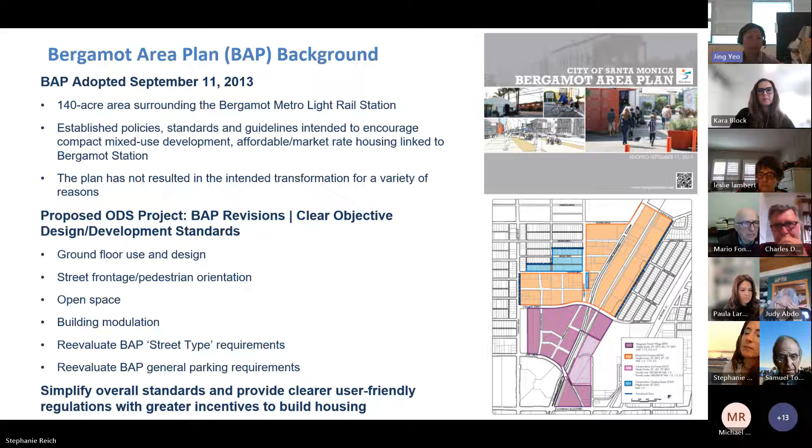Thanks, Jing. Want to make sure everyone knows that these are still concepts, and your feedback is really important to us as we move through the development of the plan.

We're looking at the existing standards in the plan and also at other areas in the city, like the Downtown Community Plan standards, an area plan most recently adopted in 2016. We've been hearing that those standards have worked — we see a lot of new construction downtown — so we're using some of those standards to pull them over to the Bergamot area plan.

As Jing was saying, because of the industrial nature, the parcel sizes are very large, and it's a really different type of area. The Bergamot area plan did identify 3 or 4 different areas within the plan, each with its own character and development pattern, as you can see in the lower right-hand side.

We're thinking of simplifying the standards, finding the right size for all of them, and simplifying them throughout the area plan. As Jing mentioned, we're going to be focusing primarily today on open space. We believe open space and permeability through these larger parcels is essential to making it into a livable neighborhood.

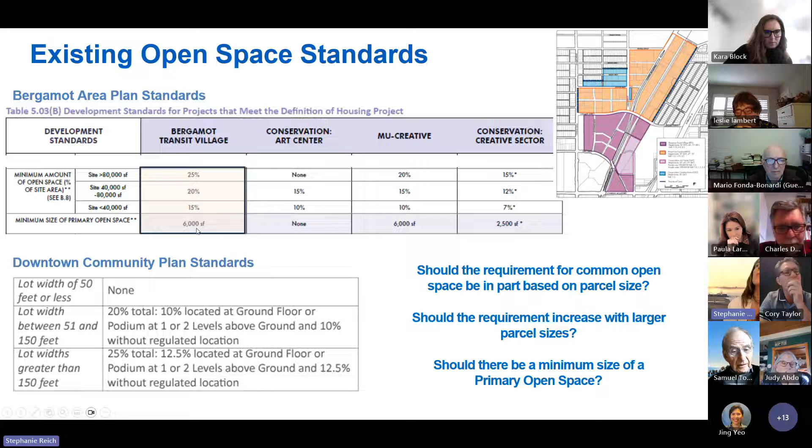The Bergamot area plan really envisioned, as Jing was saying, a transformation from this light industrial area with large parcels to mixed-use development and housing. We anticipate with the new zoning standards that transformation will likely occur. So we want to make sure the standards are simplified, that we get the housing we want and the livable neighborhood we want. The Bergamot area plan had some, we think, fairly stringent and complicated standards.

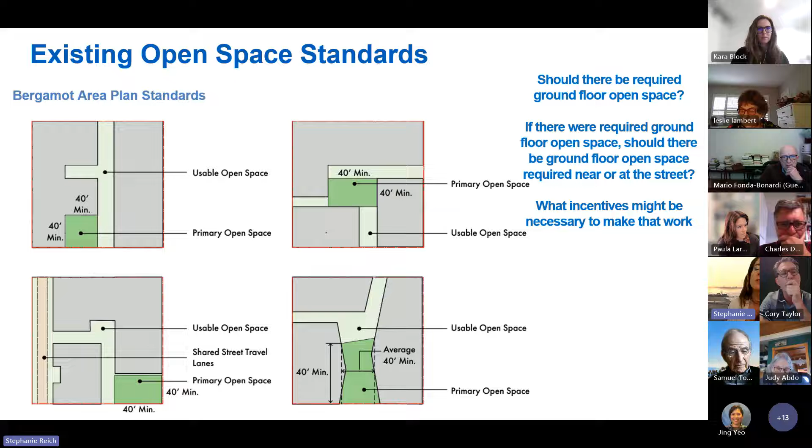This is a diagram for ground floor open space requiring a 40-foot by 40-foot minimum area and identifying where it should be on the site. One of the questions we have for the group is, should there be ground floor open space required at grade, knowing there may be subterranean parking underneath? And if ground floor open space is required, should we require it to be located in view of the street or near the street? If that's a challenging requirement that requires incentives, what incentives might make that work?

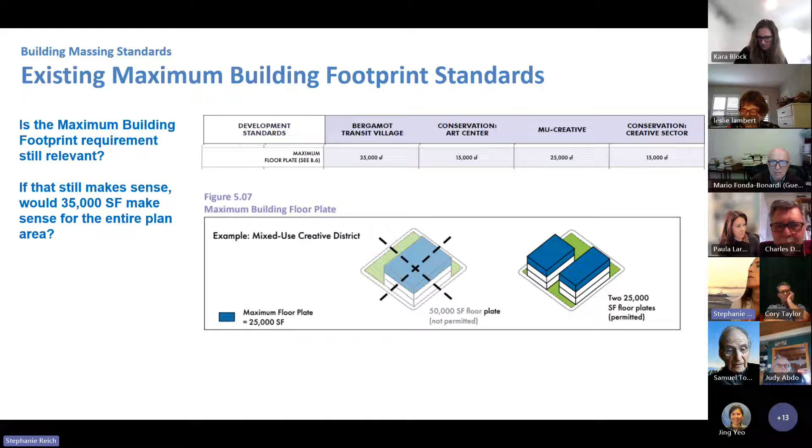Maximum building footprint is a requirement that dovetails with the ground floor open space requirement. We do have maximum building footprint standards in the Bergamot area plan, and we also have that citywide. So we're thinking the maximum building footprint requirement may still be relevant. If it is relevant, what size of footprint would make sense? Would that be a 35,000 square foot footprint? Would that make sense for the entire plan area?

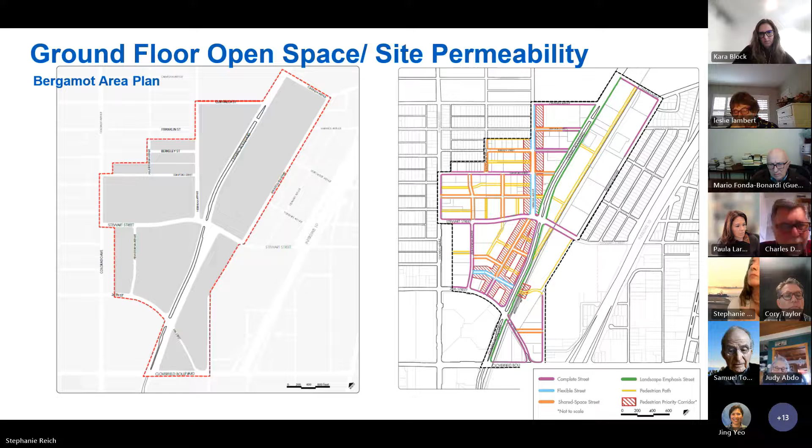AECOM and Susan Ambrosini has done some studies for us, so I'm going to turn it over to her for a bit to talk about the work she's done looking at parcel sizes and permeability. Susan? Yeah, thank you, Stephanie.

One of the things we have done is take a look at the pathways, the shared street network that was proposed in the Bergamot plan, and align it with what we're seeing on the ground today and where there still are pathway opportunities. As Stephanie mentioned, there hasn't been a lot of new development, so in general the pathway opportunities are still there if desired. We wanted to better understand what are the parcel sizes potentially for new development or on existing parcels, and therefore is that a potential basis for requiring open space and/or pathways at the ground level to improve the permeability of these larger blocks.

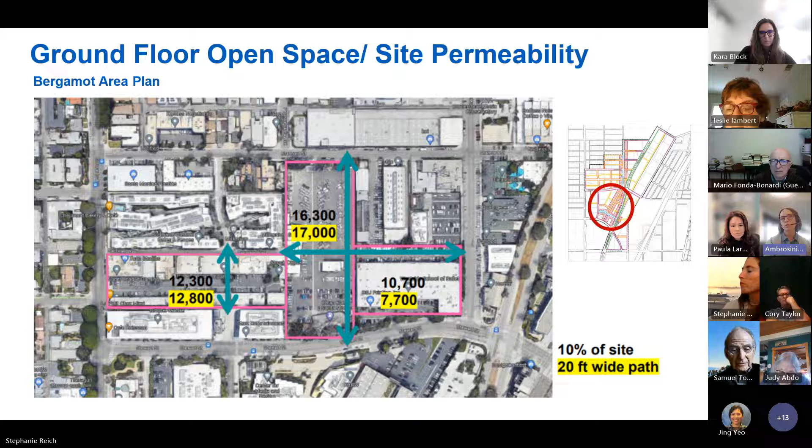So in thinking about, okay, what would that mean? How would we get that pathway? What kind of square footage are we talking about? The numbers not highlighted in yellow represent 10% of the site. In order to achieve a 20-foot wide path through the site, that's what you would need, that number highlighted in yellow. We chose 10% as a starting point, so you get a sense of whether a 10% ground floor open space or pathways requirement would get us the pathway we need at a proper width.

Obviously, these are just lines on a Google map. They could move through the site in any way. The idea is that they would link up with other connections so that we could provide some permeability for walkability and bikeability, and even for servicing these larger developments.

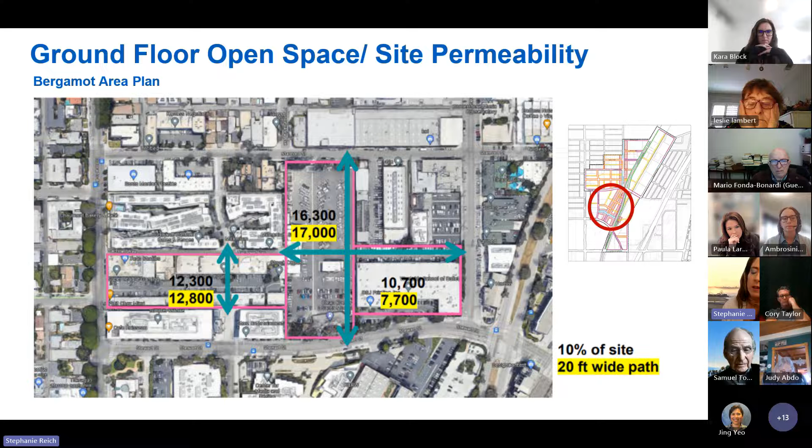So just the final point on that is the idea with the circulation is potentially for people just living in Santa Monica trying to access the transit station, for example, or the arts center, or other activity centers within the area, places of employment. It gives them more options for walking, and it presents an opportunity for amenitized open space.

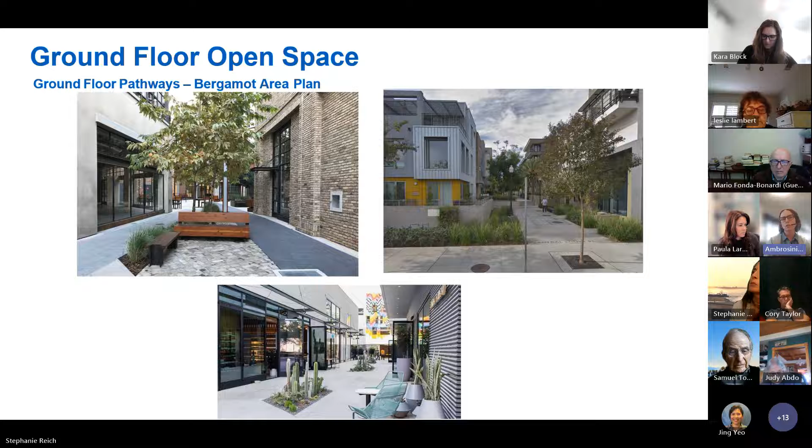So when thinking about this, back to you Stephanie. We're wondering if having this as a requirement would make sense, and if we do have this as a requirement and it doubles as common open space, how can we make it serve both services, fire lanes, and also have it as amenitized open space?

As Susan was saying, we've noticed that when we look at the parcel sizes, a 20-foot wide pathway would take about 10% or 12% of the site. If we were to require on the larger sites 25% open space, this 10 or 12% could be utilized for that common open space requirement, and then there would be additional open space throughout the project.

So if this were to be a requirement, what would that minimum parcel size be to accommodate such a pathway?

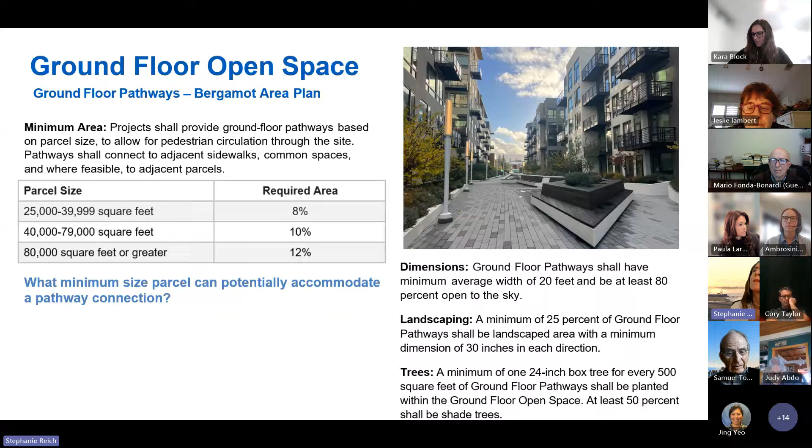To sum up on the pathways, what we're thinking is that these larger developments would need fire lanes and service access. Could they double as amenitized common open space, also serving as fire lanes, loading, etc.? Would they be feasible on lots 40,000 square feet or larger? Would it be possible to do one on a site that's slightly less than 40,000 square feet? Would it be possible that these pathways might be open to the public during daylight hours?

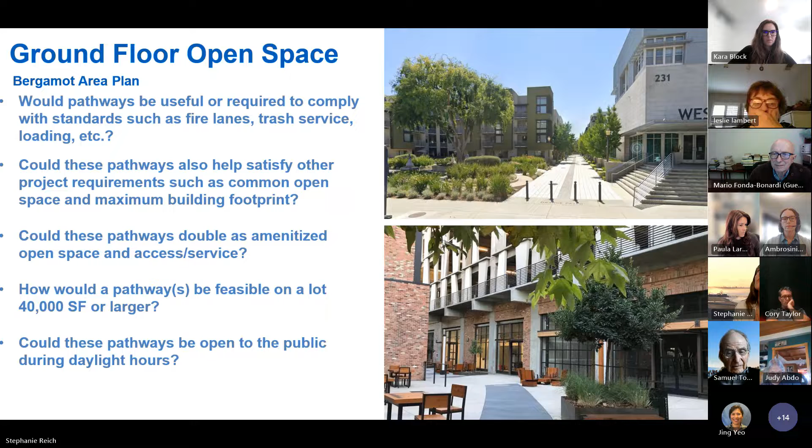And then we are going to run through some slides that many of you have seen in previous presentations. We've adopted some objective design standards for SB 35 projects. The council adopted those in December. These are still, we think, a work in process. We're thinking of pulling these standards over into the Bergamot area plan, at least as a point of departure, since we have some vetting from this technical advisory group, Architectural Review Board, and Planning Commission.

So for common open space design, is the requirement for social space necessary, and we would have cooking facilities, edible gardens, pools, spas, and we would incorporate one or more of the following amenities.

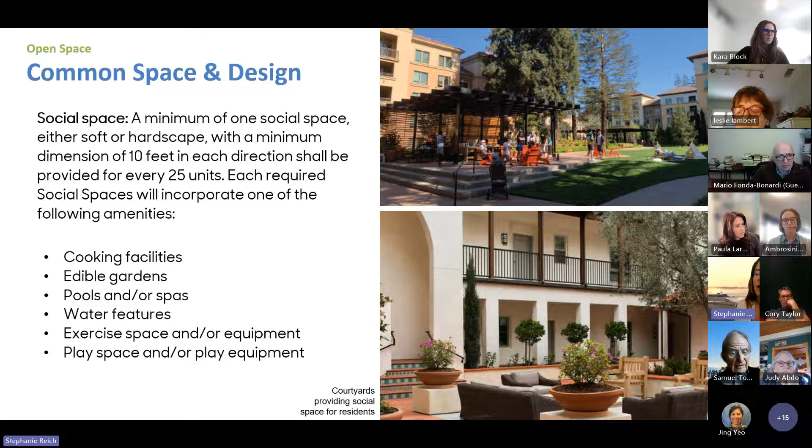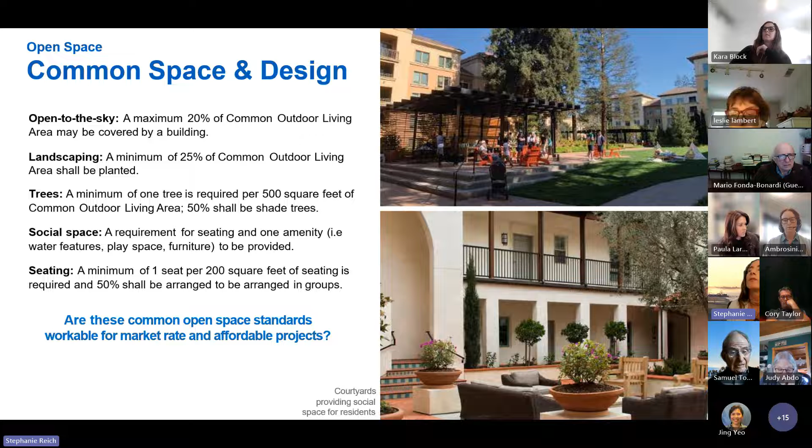And then here are some other aspects of common open space design. We always want to check in with our development teams and affordable housing providers if these standards are usable and workable.

We will be incorporating standards for residential unit entrances, because we anticipate from what we heard from our last session with some of you that there is already enough commercial space in the Bergamot area plan. We definitely heard that. Some additional commercial space may be necessary as it develops out.

We can talk about that a little bit later, but we understand that primarily if we have residential developments, there will be a lot of residential development at grade. How do we make sure that that's walkable and that there are sufficient buffers from the street for those residents? So requesting entrances and certain features like stairs or paving differentiation included in the development.

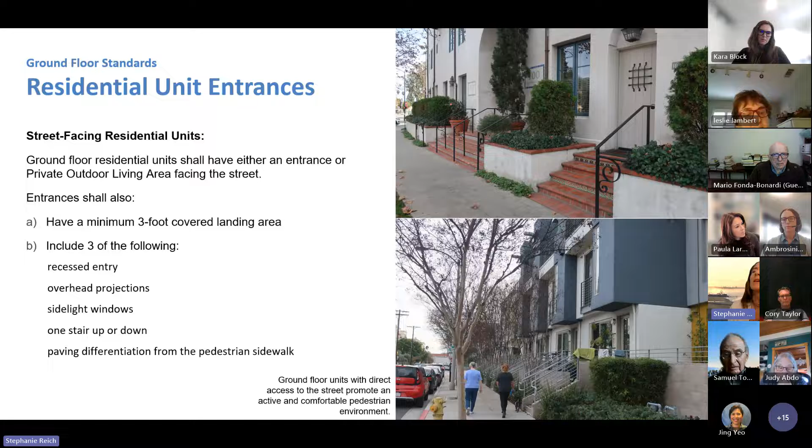We understand that many developments may have a single primary entry. We've heard that from our affordable housing developers. And then what requirements are necessary to still make those buildings open and pedestrian oriented at grade.

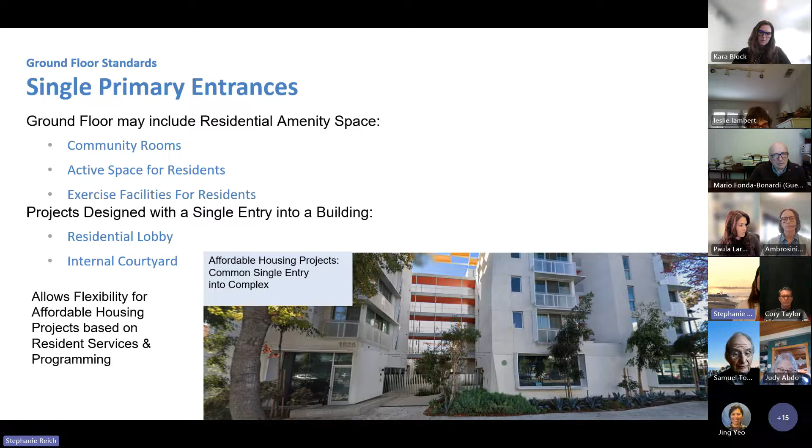We do anticipate some new commercial, potentially along Nebraska, which is one of the centers of the Bergamot area plan. And what requirements would we need for that commercial to also make that walkable and to make that commercial space viable?

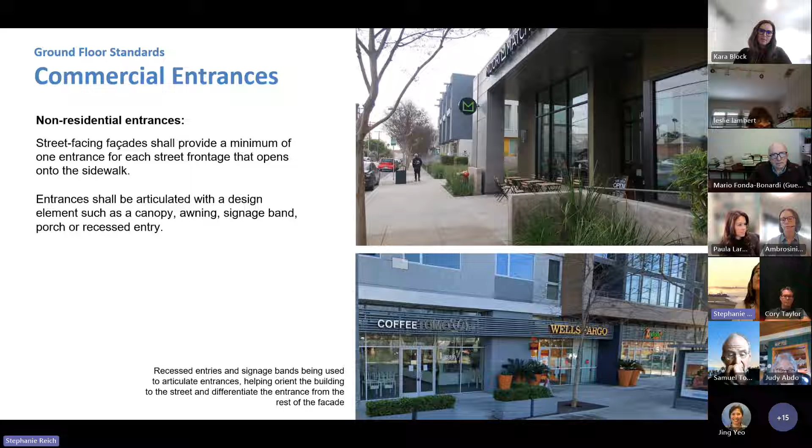Some more about commercial entrances. And then requirements for transparency.

We know that there are lots of requirements for our development teams, fire requirements, structural requirements, and many buildings, especially if there were to be a maximum footprint, then every building has 4 or more sides. So how can we make the street facing facades as open and interesting as possible? And how much change in material and what is the ground floor going to look like?

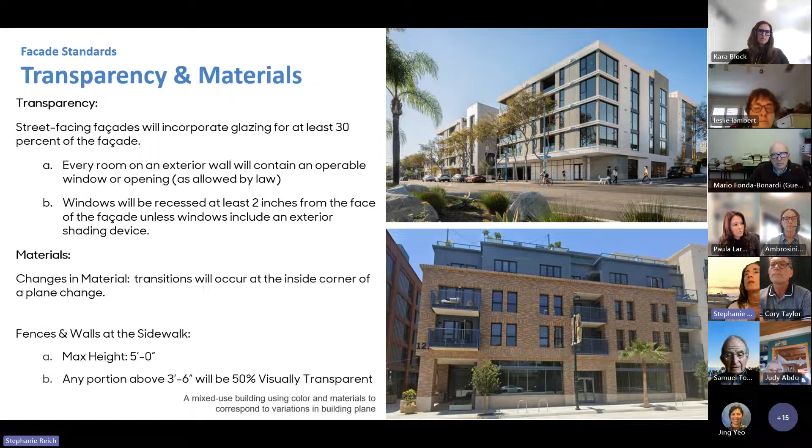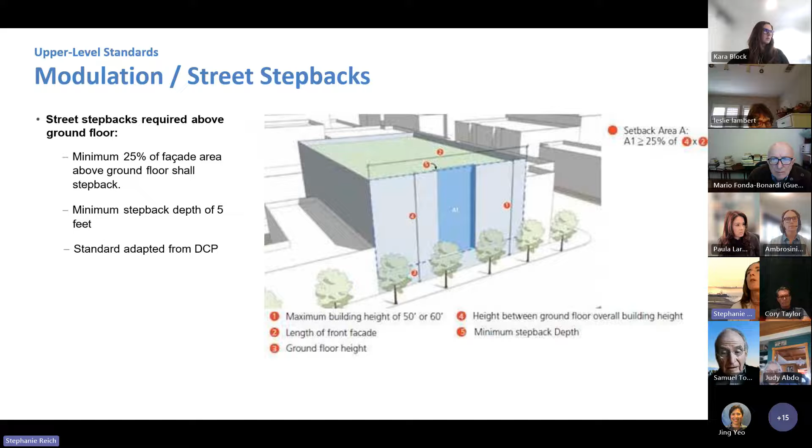So here are some ideas for the standards that we might pull over into the Bergamot area plan. We have modulation requirements in the downtown community plan that we think have been very successful. We think that the developments we've gotten downtown with these more flexible modulation standards have really worked well. So we're anticipating using these standards as a point of departure as we look at modulation standards for these new residential and larger buildings in the Bergamot area plan.

We understand the fire needs if you're building on a property line, and in order to maximize light and air to the units and to have a multi-sided building, we're requiring at least 15% of the side interior building and a setback depth of 5 feet so that we could have some window openings.

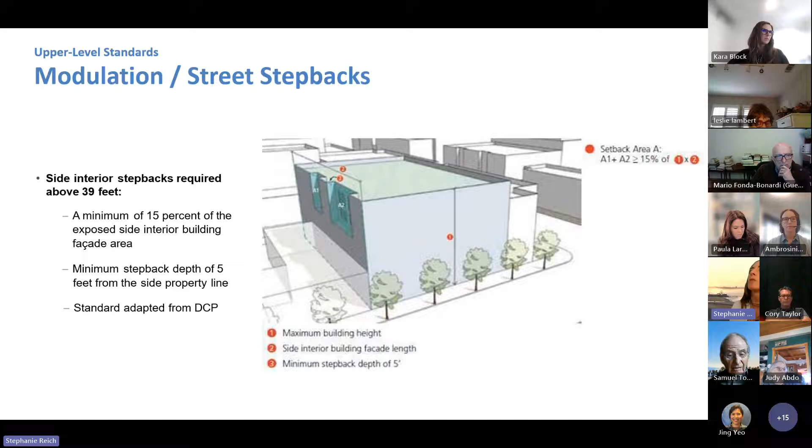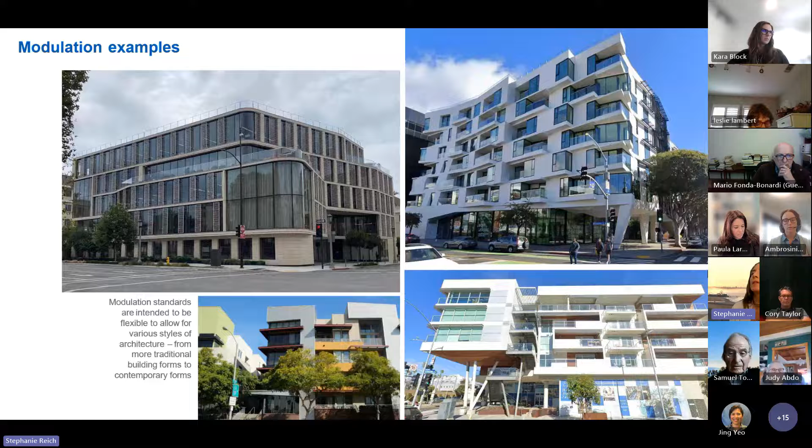And here are some examples of modulation, some from our downtown and some from other places in the region.

We're looking at pulling over the daylight plane requirement. That's been a longstanding requirement that helps transition to a lower residential neighborhood. This would be required in just a small area of the Bergamot plan that does butt up to adjacent residential. So we're also looking at this requirement and seeing how we could modify it so that it is more possible to get that in a development.

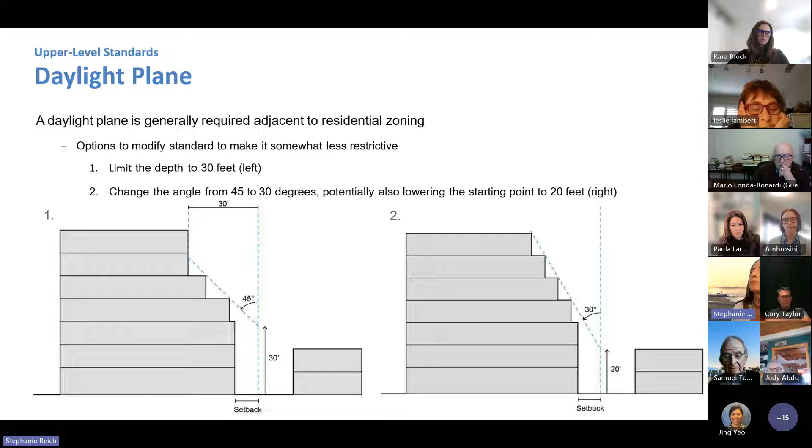The Bergamot area plan required roof line modulation. We are looking at a more flexible standard so that there's not a required setback or a wedding cake, but just a smaller percentage of development at the roof. The other areas could be used as common outdoor space.

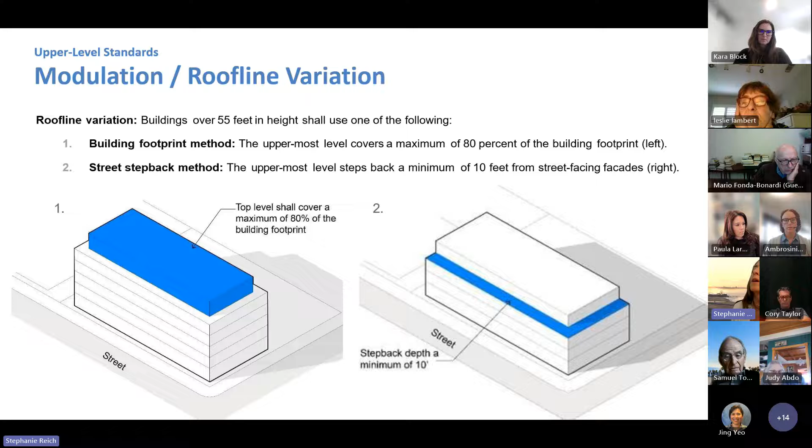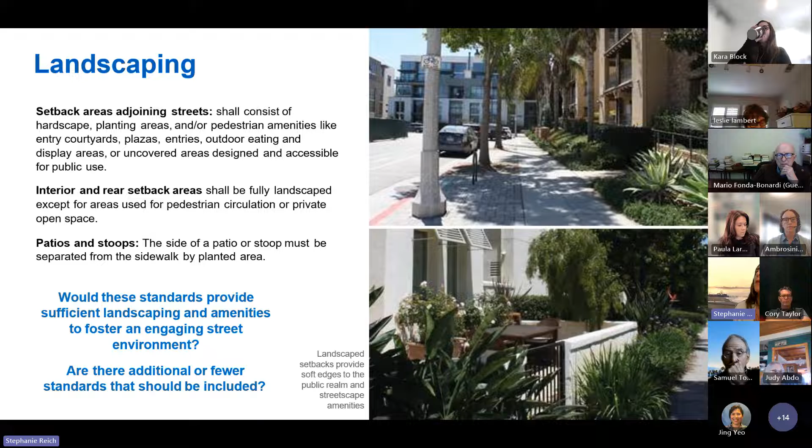I'll just talk a little, because I know not everyone can stay for the entire 2 hours. I'll just touch on some of the next steps before we go back to the presentation and ask questions.

Today is our first technical working group session. We'd like you to mark your calendars for April 18th. We will likely talk about standards for taller buildings, and we will have study sessions with the ARB, Planning Commission, and Council. Our target adoption is to City Council on September 24th to meet our housing element requirements.

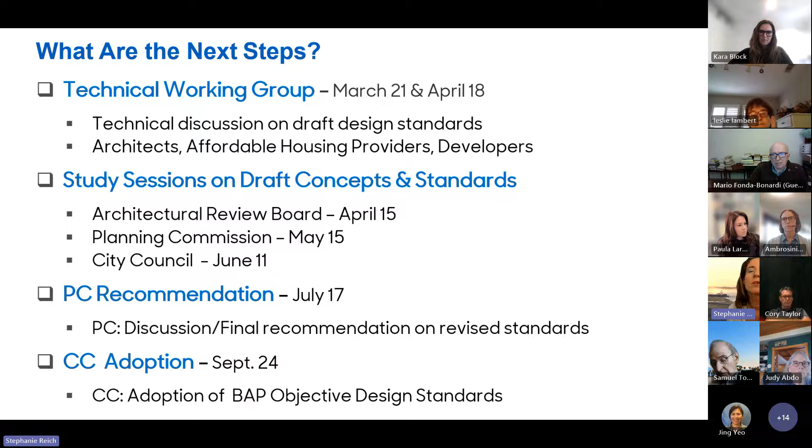And with that, I will end the slideshow. I'll keep sharing my screen because I would like to go back and start by asking you the questions that were in the slides to begin with. And Stephanie, please take a moment, also if you'd like to speak, please use the raise hand function. Our staff is monitoring that, so that's the easiest way, given how many people are on this meeting, to know who would like to speak next.

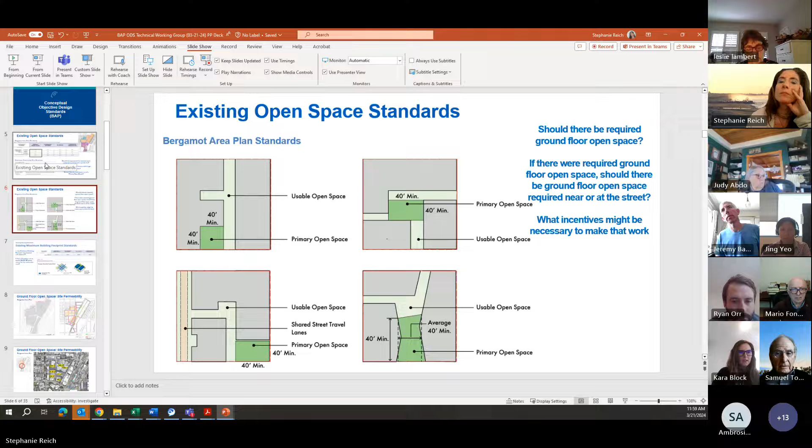On one of the other slides, I think your required area... it was a parcel size of 0 to 39,999 square feet required 8% of open space. I think you adjusted that to be... okay, the 25,000.

Yeah, so this slide - this would be if pathways are required, maybe this is the amount of space that would be required for the pathways. That would be part of the open space, provided there was enough landscape and amenities to make it usable as common open space, if that makes sense. So we would still want an overall standard of common open space closer to what we have in the Downtown Community Plan. So on a site of 80,000 square feet, we would want 25% open space for that, right? So overall, we would want 20,000 square feet of open space on a site that big.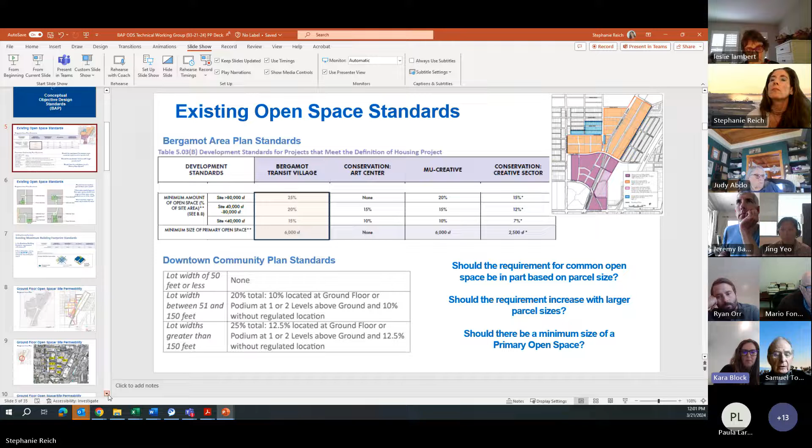Right, okay. So let's start with this one - for sites of 40,000 square feet, that's small. So 15% open space here with a minimum open space or primary open space size of 6,000 square feet - that's kind of a large open space minimum, I think. And then if we go to that other chart, the 8% of a 25,000 square foot lot is 2,000 square feet, which could be manageable.

But I think the minimum of 20 feet - well, a 20 by 20 foot is fine, but I think you need to look at the minimum dimensions or minimum square footages, especially on the smaller end of these lots. I think there's going to be issues if, for example, on the first slide you require a minimum of 6,000 square feet in one area - that's going to be tough. And then potentially a minimum of 20 feet, although I know your courtyard minimums are 20 feet anyway, so maybe that's not an issue.

But just looking at those numbers as they pertain to the smaller lots, I think is my biggest point. Yeah, that makes sense. I guess Leslie's comment at the very beginning kind of sticks with me, that if we've got a site like this of 123,000 square feet, and that's being broken up into at least three sites, then how do you make sure that there's access through each one? If we don't have setbacks planned between each, right?

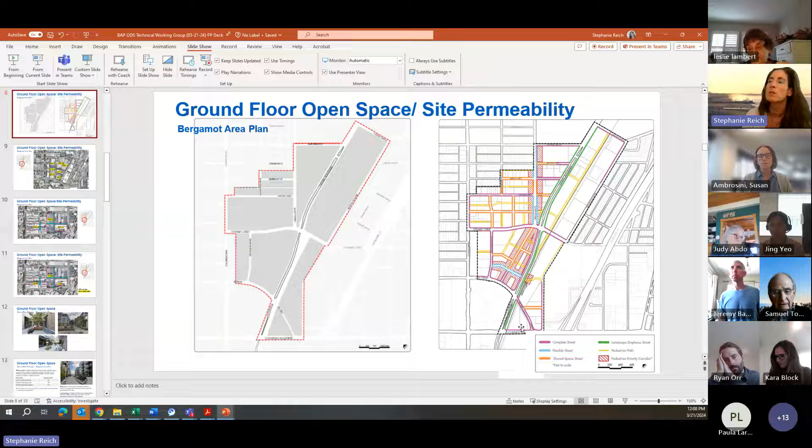That's one of the things we're trying to figure out—as we said in the beginning, this was the desire in the Bergamot area plan that was adopted a little over 10 years ago. So within new housing state law and incentivizing housing the way we want to, how do we write this? How do we make a standard that our developers feel is friendly to them, that won't be waived, that we could actually realize, and in a way that creates a street network and a walkability network that's not haphazard. That's the goal here.

Yeah, and I think, Sam, the real challenge in Bergamot has been there isn't a master landowner. The city doesn't own a lot of land north of Olympic—we have the art center and what have you, but there are just individual property owners. And when we're dealing with private property, like you're saying, it would be great if we could create the sort of grid and these walk streets out of it, but that's private property, so you'd have to pay them for that if that was to be advanced.

And so the idea in the Bergamot plan when it was adopted at the time was that it would be through a series of development agreements where you can negotiate for those things. But the rules have shifted substantially since then. So we're thinking about how to unpack this puzzle in partnership with multiple property owners—what would make it a win-win, attractive to provide these sorts of connections that work for the developer and overall benefit the community, within the box we're in when it comes to housing projects.

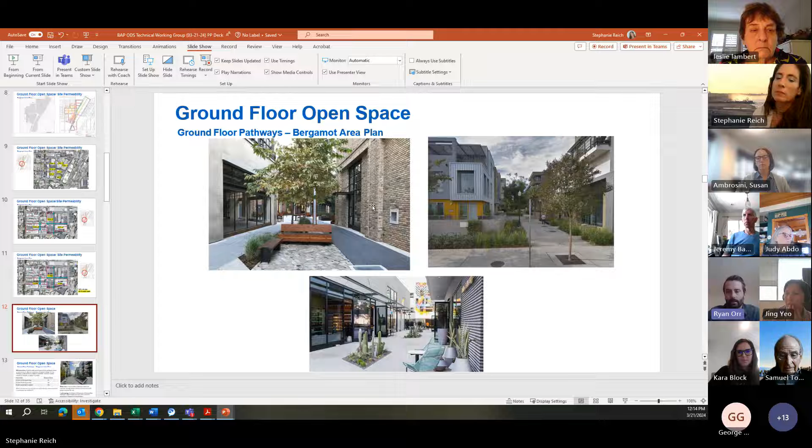Normally we like to see it in the alley, but could you do it this way? One thought is maybe you pick your main corridor - that's the give and take - how are all these buildings going to access the train station? You pick a main corridor to do that, and then you still know you're going to have these smaller alleys that function more like delivery and access from that standpoint.

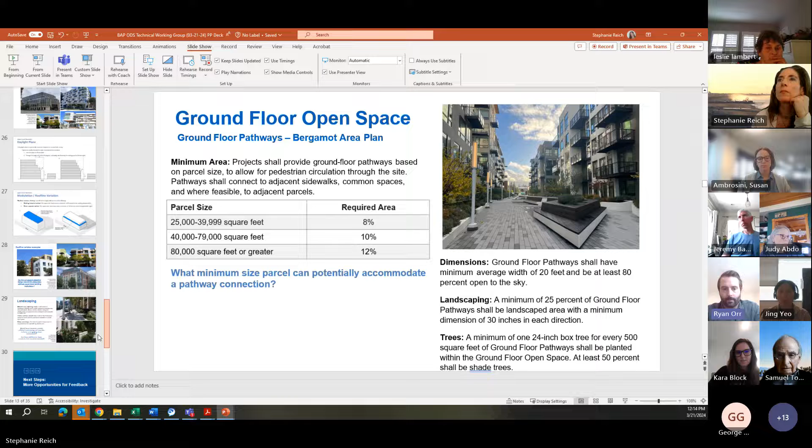Just one other quick thing on the setback - I had this exact condition on a building, if you wouldn't mind going back to that slide. What we ended up doing with the County of Arlington, they had a very similar condition. What helps a lot is the degrees don't necessarily matter, it's the number of steps. So if you can just do a 5 or 10 foot setback, two-thirds up the building or whatever you deem necessary, that makes it a lot easier to design and build rather than a layer cake. Ideally just one step would be ideal, or minimizing those steps would be ideal.

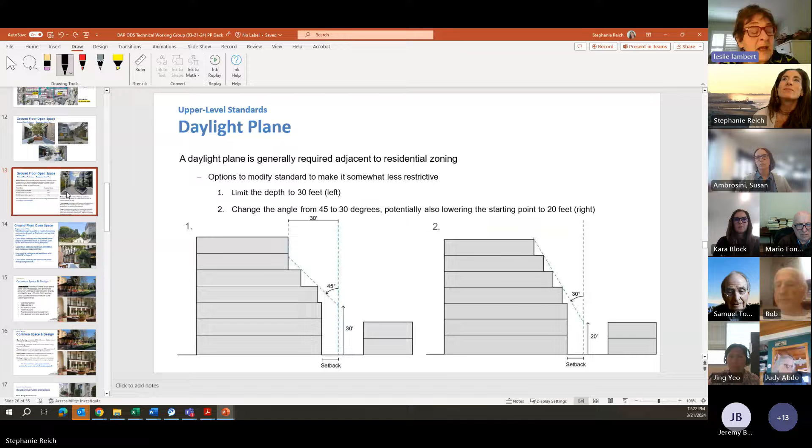I think one of the reasons we're focusing on this and on ground floor open space is to see how we can make such a requirement so necessary, as Jeremy was saying, that it is necessary to have cut-throughs in the project for service access to driveways. We've seen those service alleys done well with landscaping and lighting so that they could double as common open space. We've seen it here in the 500 Broadway project - as you enter into Trader Joe's, the landscaping is fairly lovely. We don't have a picture of that because it's not exactly the ideal we'd be hoping for, but it's certainly a start. What we're hoping is that we're able to use the information you're providing to write a standard that won't get waived.

I think there are some questions in the chat. I want to make sure we get to them because I don't see any more raised hands. Stephanie, I think they were addressed already - questions from the beginning, yeah. Great, okay, so I want to thank everyone for using the raised hand feature. I think that really helps us have a conversation where everyone gets in. But there are a lot of participants who haven't spoken up, so I wonder if - okay Cory, why don't you say your question out loud?

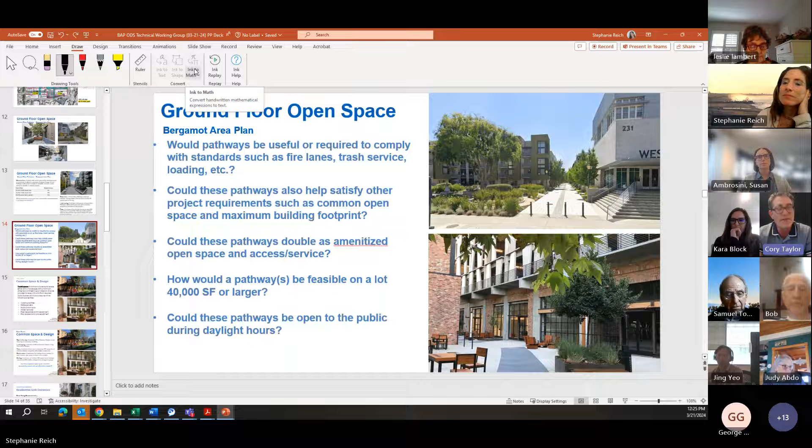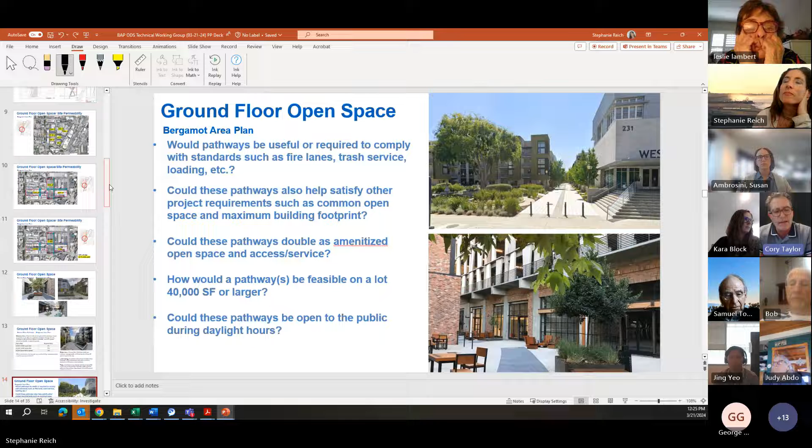Oh yeah, not so much a question. I was just agreeing with the way of potentially codifying these access pathways. It seems very appropriate to define minimum block lengths specific to the location orientation, because the city grid is already predefined there, and the access paths are located with that in mind. But I do believe it's very hard to understand how you would separate vehicular traffic from pedestrian traffic with these access points.

Just by landscaping, I don't know if that's something where those can commingle. I guess that would be the biggest challenge in my mind as well.

Yeah, I guess what we're thinking of, and we understand that the taller projects we're seeing naturally have smaller footprints because every residence needs daylight and access to light and air based on the building code. So we're thinking that a 35,000 square foot footprint, which is still pretty large, might enable us to get a pathway through the buildings that would provide service and also some measure of open space if it could be tree lined as well.

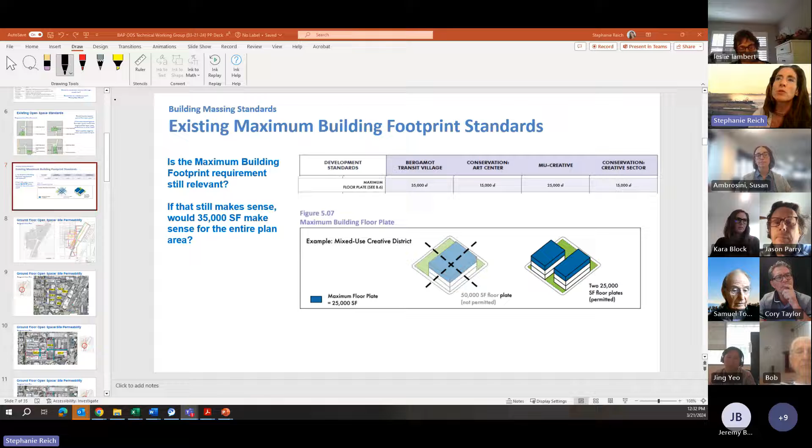Well, Jason, I hope that you can attend our next meeting, because we'll be focusing on standards for taller buildings, and your input will be really important. I'm not sure that I quite understand the use question. So throughout the area, commercial will continue to be allowed.

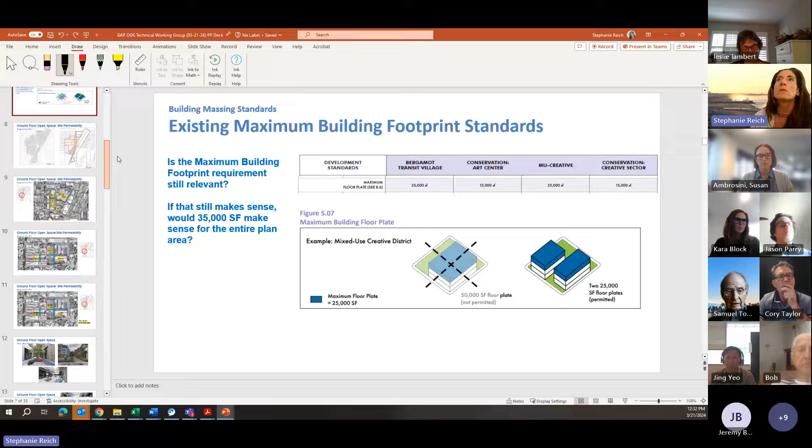We may look at, let me go back to one of these slides, a map slide — we may look at certain places to focus some additional commercial, similar to the Playa Vista development, where there are certain nodes of commercial as all the housing developed, and those are very successful and very necessary. But residential, commercial, and institutional uses will be allowed throughout the plan.

So one of the challenges I think with the live-work model has been a building code challenge and not a planning challenge. So I'm curious as to the issue of use that you're talking about as it pertains to the school.

Right, and there may be school-specific requirements regarding perimeter security, privacy, and the permeability for structures that do or could in the future front the public right of way. As I look at how schools seek to use space and the potential public value of having some visibility into that space, I just question whether those standards truly should be applied to a school.

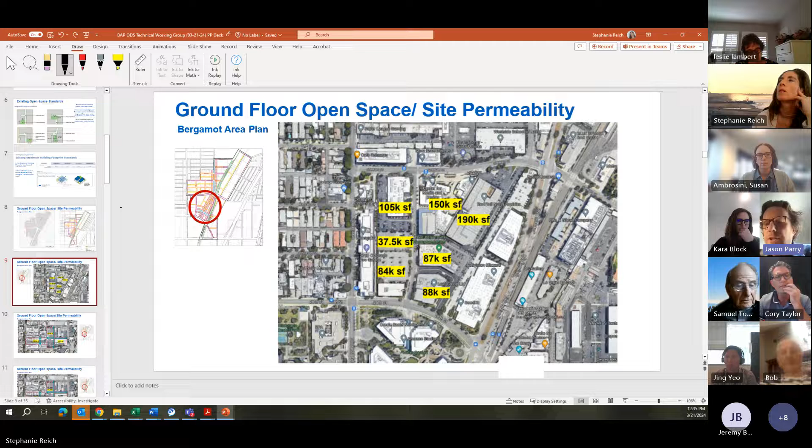The campus is currently very exterior. The common areas, almost every space outside of a classroom, is outdoors, and the school is going to have to reconsider that basic approach in the future. Whether Crossroads will have to reconsider that as well, I don't know. I can't speak to any other school's situation, but it could potentially mean that outdoor space requirements, even though that's the school's current way of doing it, may not be the best approach in the future if it's surrounded by 20-story buildings.

So there are a range of things that the school is considering and talking about that we would hope are reflected in these policies, and I would be happy to follow up with you to drill down on some of the details. Yeah, I think that'd be important, because we may also be looking at completely different models that are used in cities like New York and Chicago, for example.

Okay, well that's super helpful. Thank you, Jason. Let's see, anyone else? I was hoping Anahit might want to make some comments, but maybe we'll follow up with you later. Oh, here she is. Hi, Stephanie. I don't have any comments right now, I've just been listening in. I'm sure Michael will later. Okay, great, thanks for checking with me.

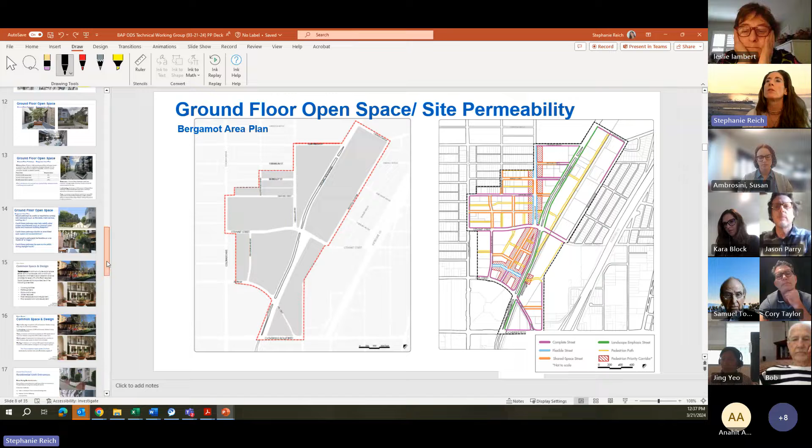Okay, well while you're all thinking about additional questions, why don't we talk about next steps. So again, please talk with us again on April 18th. Tell your friends and colleagues. We'll probably be focusing then on tall building standards, because we see those coming in our applications, and we haven't so far addressed them in our code.

We will have study sessions on April 15th with the Architectural Review Board. We'll also be working with the Architectural Review Subcommittee on the objective design standards. After that, we'll be going to Planning Commission on May 15th, if all is well. I know that seems like a far way away, but it's a pretty aggressive schedule in planning department terms. And then City Council on June 11th.

So these are all the study sessions. And then we're hoping for a recommendation from Planning Commission on July 17th, so that we can get to City Council adoption on September 24th. And for those of you who like to see dates in a more linear fashion, here are the dates in a different kind of chart.

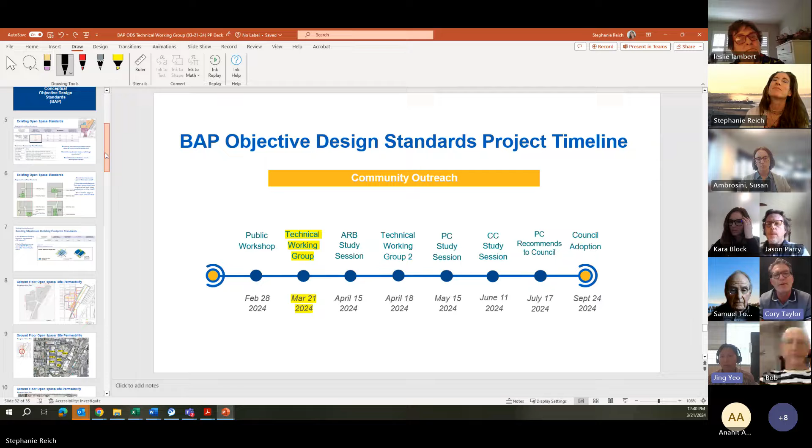Yeah, so I think as we said at the beginning of the presentation, I'll just go back to the Land Use and Circulation Element, which was adopted in 2010. That was looking at the general plan throughout the whole city, and it identified these particular areas, largely on the spine of the Expo Line, that we would do further study into, Bergamot being one of them.

The other two were the downtown community plan and the Memorial Park station. Bergamot was this transit village idea, and it grew from the concept of a new train station - how do we convert this area to encourage more housing? And we are where we are today. What's influenced the recent actions the city has taken to upzone for housing in this area was really driven by the housing element and the state's allocation requiring the city to plan for close to 9,000 housing units. That's what really drove this.

This was an area where during the housing element process - over the last 10 years it really hasn't turned out the way it was expected to. Not that there isn't commercial interest, but it was geared towards a development agreement model, treating housing, commercial, and office projects all the same. So I wouldn't say we have a target here. It's really understanding where we've been and the obligations we have under the housing element - what are ways we can incentivize housing in this area that hasn't worked over the last 10 years. We're responding to feedback from property owners and community members that this plan is too difficult to understand, and doesn't provide enough incentives for housing. The standards are too difficult to work with.